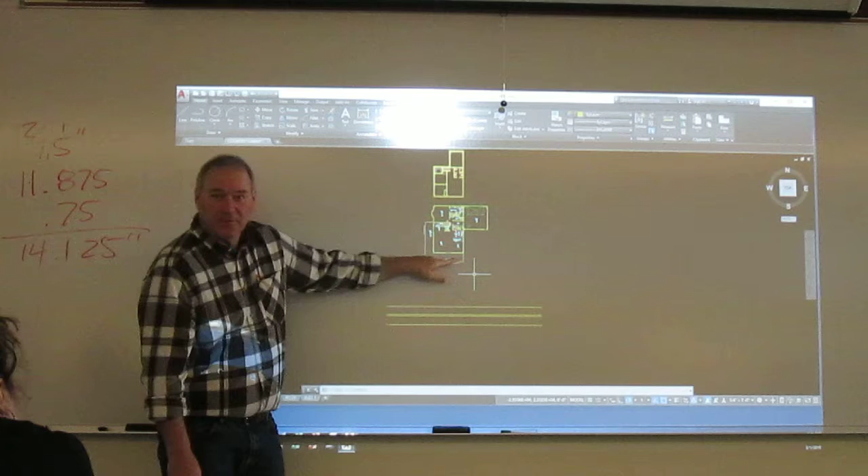That also lines up with my upper floor, but you need to pay attention to which floor you're on. In this case, that wall is constant through the basement and up through the upstairs, so I can grab either one, but if you want to break them off in sequences, you can.

I'm just going to grab this one and drag it straight down. Let me show this. And this one, I'm going to drag it straight down too. That's the edges of my house. Now I'm going to trim it a little bit here. And my basement's done.

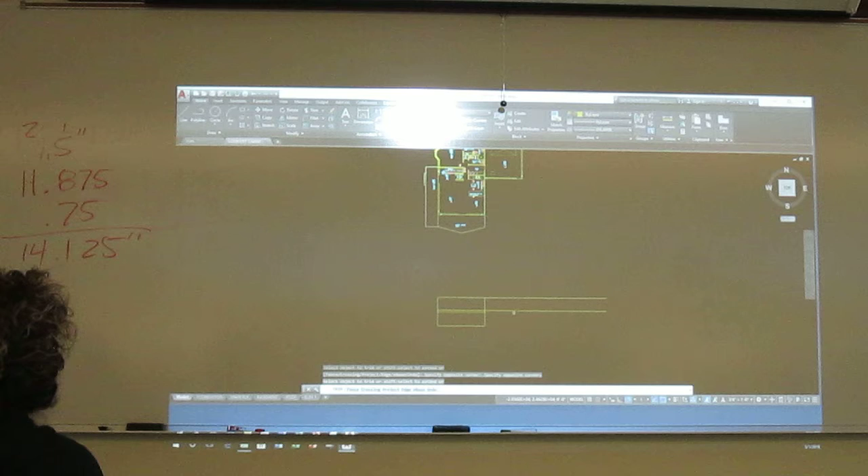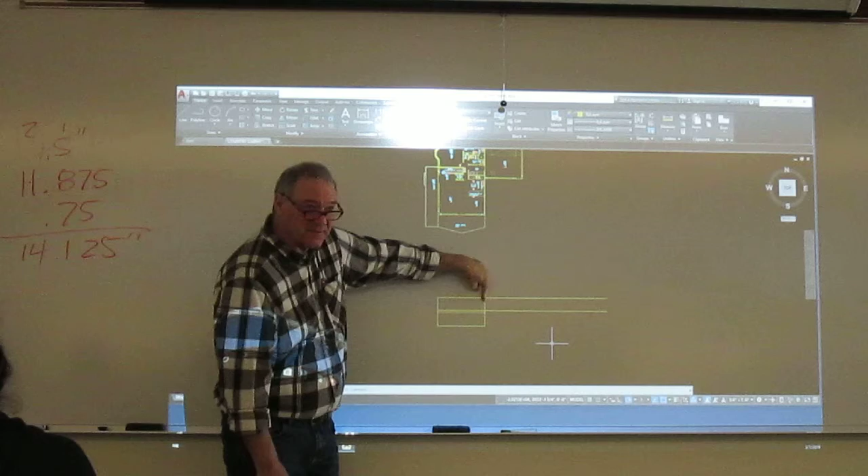So here's my house: basement, first floor. Now we also have a garage sitting out here that's only on the upper floor. Let's bring that other wall down. We know this wall's common right here from the outside, we only see the outside of the wall, right? So we don't need to show wall widths or anything like that in these views.

So I'm going to bring my garage down, and it's going to sit right here. And I can trim that up.

Now the last thing we ought to do height-wise, let me grab my little drawing. We're going to throw in the ground here to help you realize this, because the garage is really kind of not shown correctly on that.

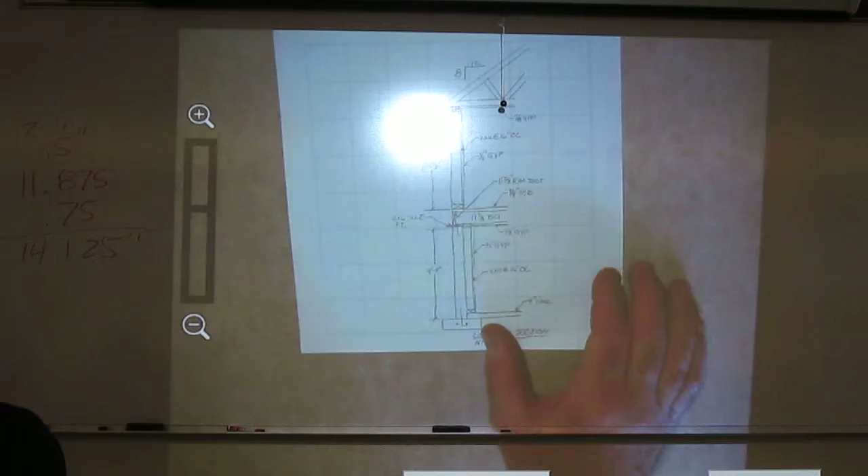Where does our garage sit? We talked about this way back in another class. I remember we talked about this factor. Your garage has got to sit on the level of the soil, right? The floor of it. And this will be the garage floor.

Now the foundation for the garage is going to match up, same as this, but the ground will be down here. We're going to deal with finished floors, so we kind of want to see that. Where is the ground going to be on this house?

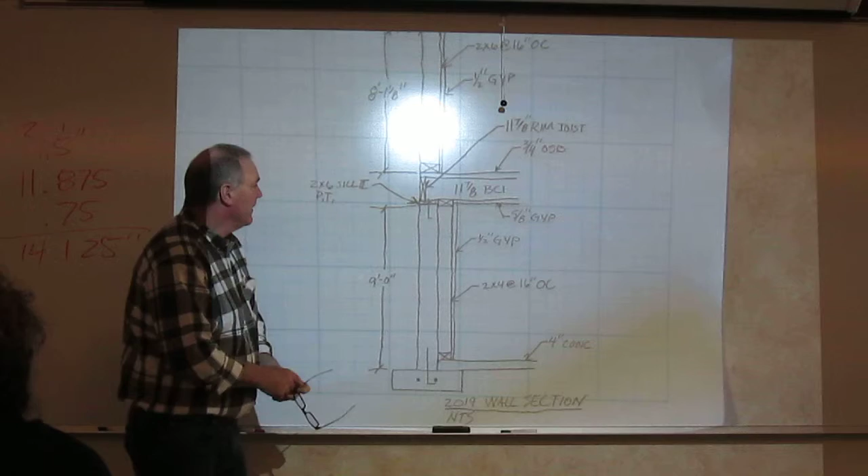Well, by code, this dimension right here, from there to there, must be greater than 6 inches. You have to have 6 inches. The soil can't be within 6 inches of any wood member, let me put it that way. So that's how we pick up that ground.

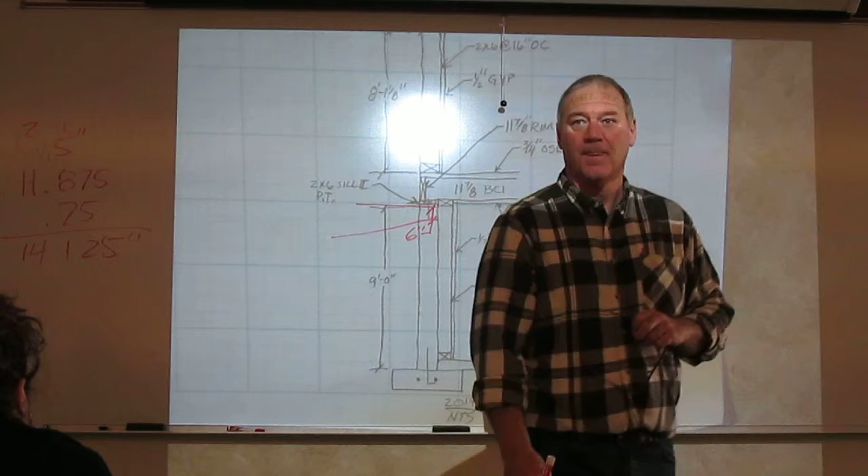Now, we haven't really talked about crawl spaces and foundations, we'll get to all that stuff later. We're just kind of roughing it in. So we can come in here based on this line, top of our garage wall, and find out where our soil is going to be. We can kind of estimate it. Nobody's really going to know until they build the house and grade it, but we can make some stabs right now.

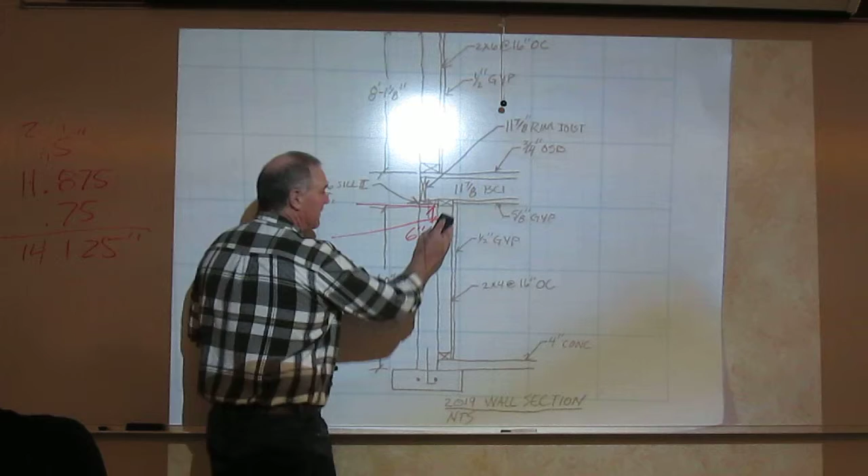So with that said, we got to be 6 inches below the top of that first floor. So let's put some soil on this thing. I'll go back to the computer. So here's my house.

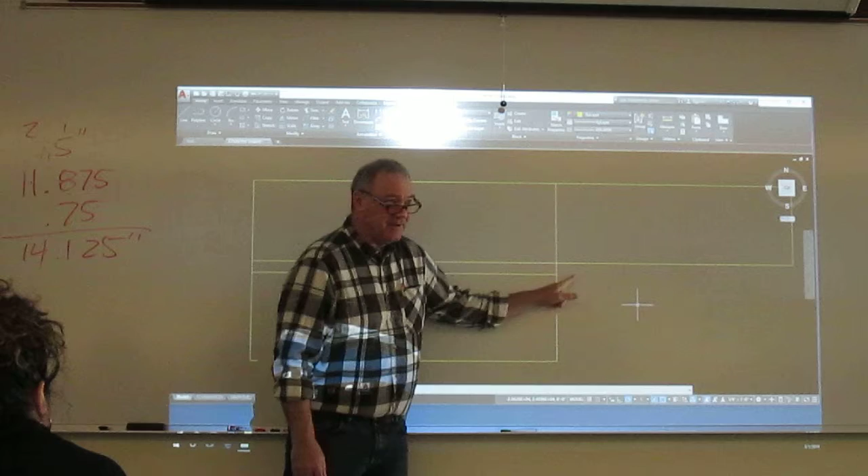This is my ceiling, right? This is the top of that garage wall. Soil's going to come in 6 inches below it. Now, it's clear down here on this level, but we've got the garage that we're dealing with. That's what we're talking about, is up here. And we'll also see it on the first floor up here. So let's do that.

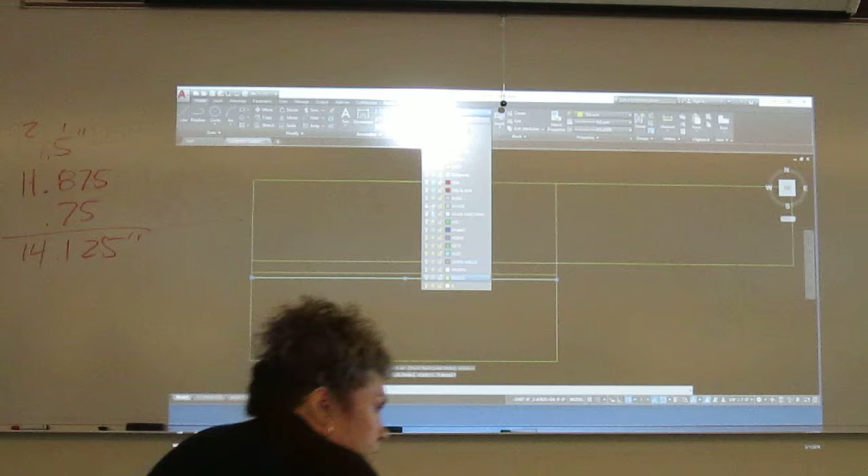Let's do an offset of 6, and I'm going to offset that basement ceiling down 6 inches. Now, I'm just going to switch the color on that so you can see it, and I'm just going to throw a line out on the side like that there. And let me move this one over.

And on the garage, let's extend this outside one down, because it's going to go right there for the finished floor.

Excuse me. So you see those two lines I've got on the side that kind of slope off right here? That's going to represent my soil horizon. If you want to do it now, typically these are shown as very thick lines, so you might want to throw them on your border layer. Do they have to be a certain length? No, depending on how we set up the view, we're just going to chop the soil off.

You've now drawn your first building. Now, the thing we got to look at here, do we have all of the walls? That's what we're drawing, okay. So look up at your floor plans. Do we have all the edges of the wall? Okay, Declan, you're shaking your head. No, what are we missing? The little thing by the master bedroom.

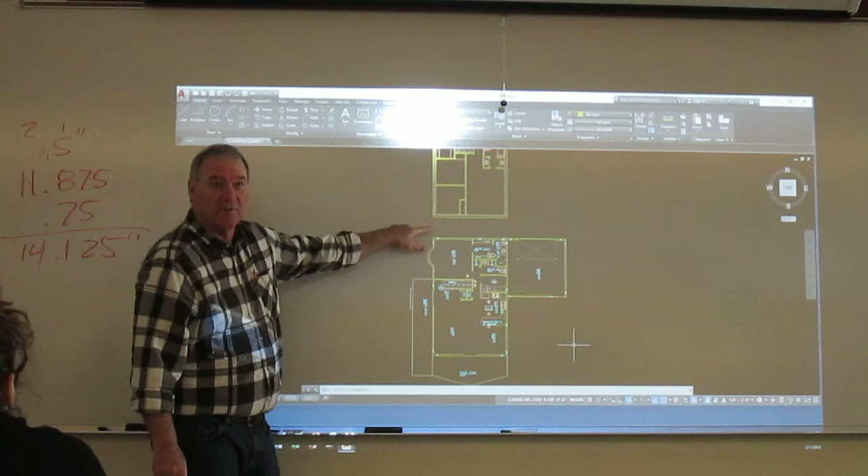We got this. We see this from, this is orthographic, right? You're at infinity looking, so you're going to see this true size and shape. So if you've got this in your plan, we need to project it down. So I'll bring that edge down. And that is going to go, again, it will be on that finished, it'll go clear to the soil horizon. So you see it kind of like this. If you don't see it from this view, you don't put it.

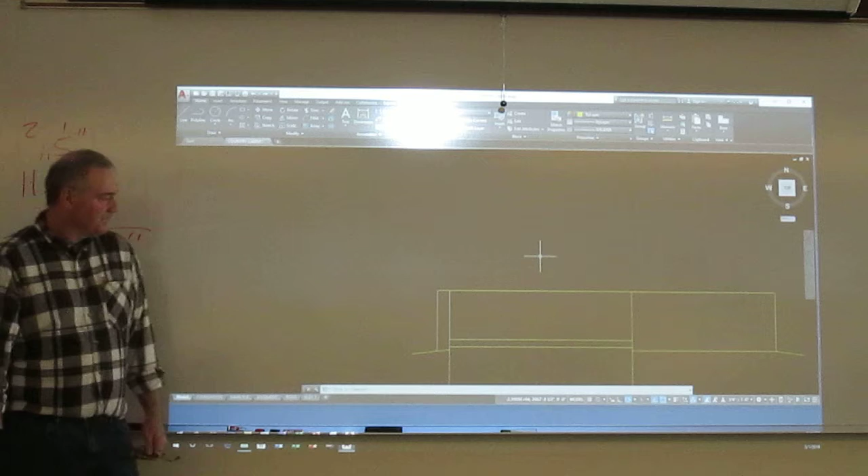Now the next thing we want to do is we want to throw in all of your doors or all of your windows, whatever you see. Now I don't have mine really drawn in these two views, but I'm going to kind of estimate them.

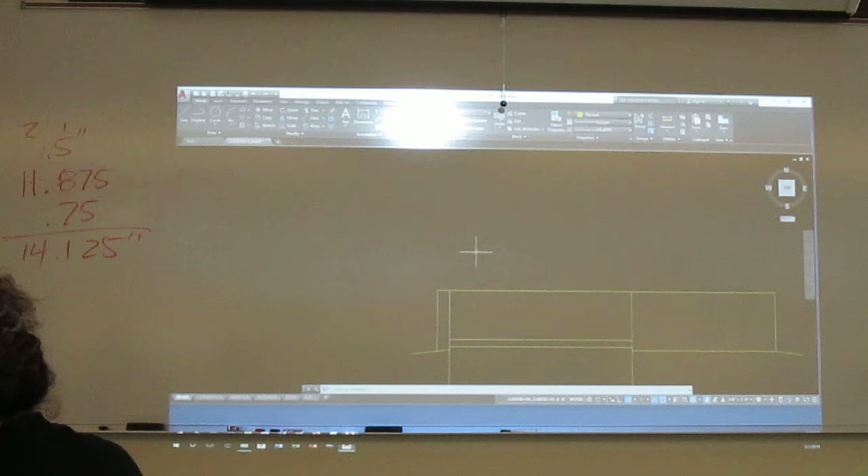Okay, so in the basement, your client asked for a window in this room, right? We need an egress window, so it's going to be a window right here. And there's going to be a slider right here. And I'll just call this a 6-foot slider.

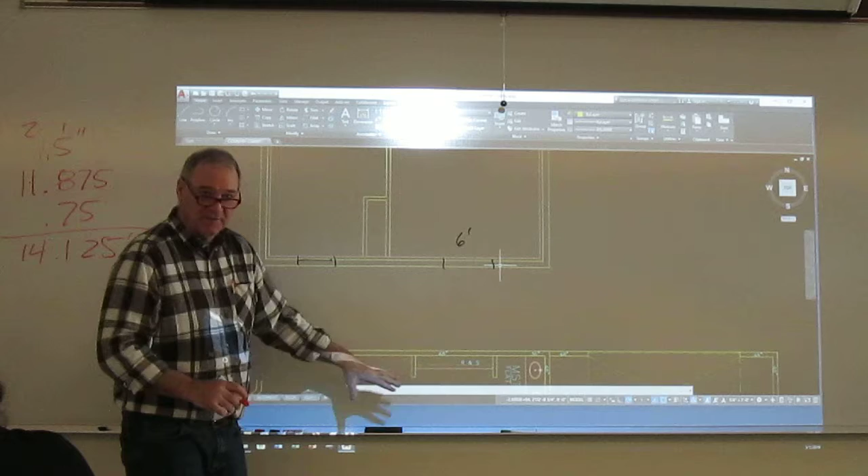So let's project, since there's only 2 in our bottom floor, and I would suggest you stay logical, do all the top floor and then go to the bottom floor, or all the bottom, go to the top, so you don't miss something, right? So I'm going to go on the bottom, and I'll just pick spots for this. Okay, and we're going to bring those down.

See how close I can come to my little black marks there. Nearest, look at that, it's right there. Okay, and all I'm going to do is I'm just going to project that way down through my drawing. If I had that drawn in, I'm just snapping. I've got to go ahead and do an offset of 72 here. Okay, so there's the 2 sides of my door.

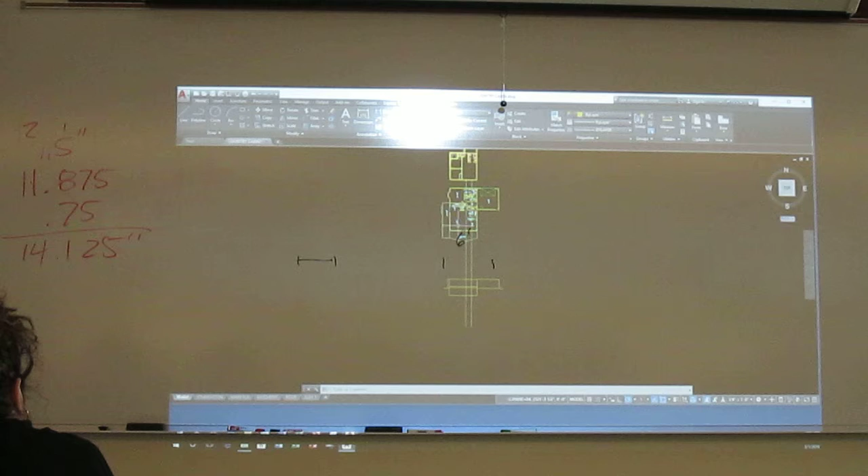And you would project that right from the view if you had that drawn in. And then I'm going to have a 5-foot window over here too, so let me just go ahead and kind of guess it. Using their snap, it's going to be about right there. I'm going to bring that down and we'll copy this over 60 inches. Okay, so I've got a door and a window there. And I brought that down.

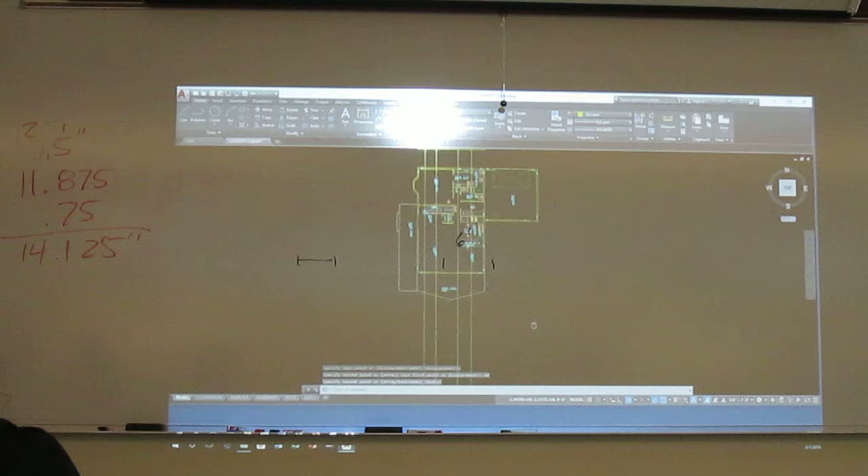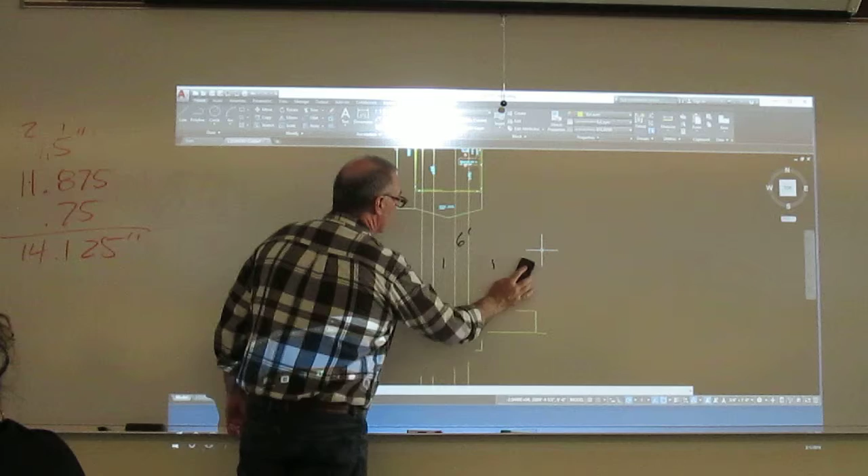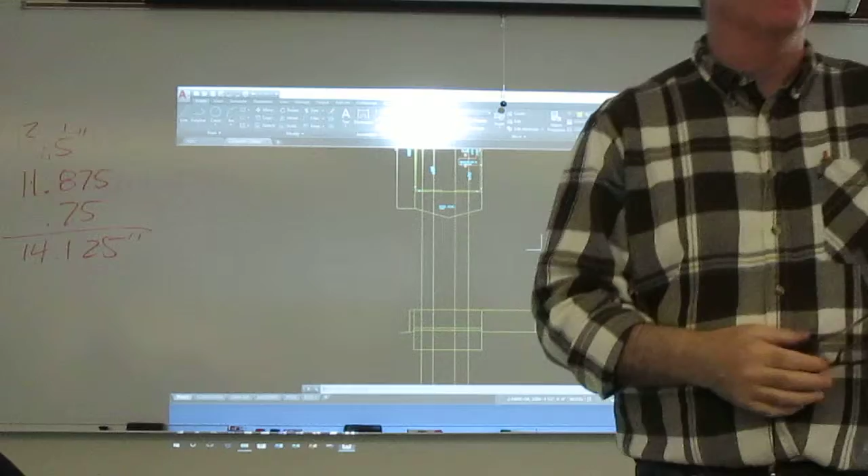Y'all good on that so far? Okay, now what is the height of doors and windows? The standard height is 6 foot 8 inches. That's where we put almost all of them. There are times you will adjust that. If I'm doing a 9-foot wall, a lot of times I will bump that up 6 inches or even a foot. It just depends. For us, we're going to stick with 6 foot 8. Okay, that will be the top of all doors and windows.

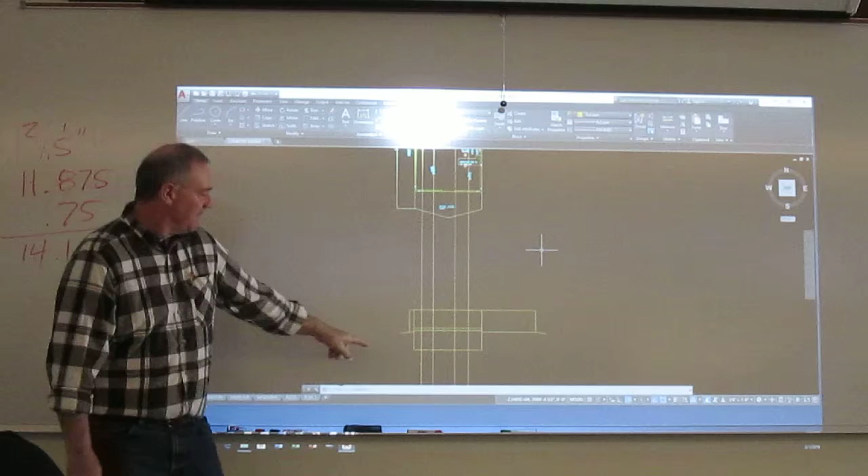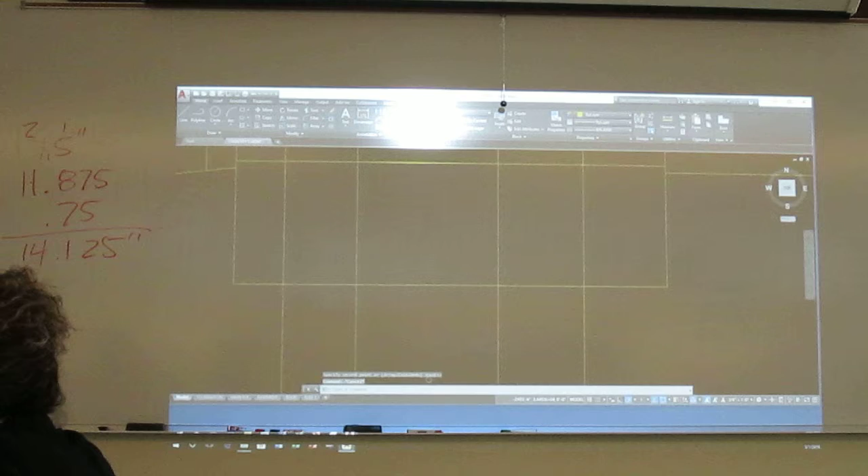So I've got my finished floor right here, right? So I'm going to offset up 6 foot 8 for the top of it. Okay, so I come down here and do an offset, 6 foot 8. Bring that up, that's going to be the top. So I'm going to trim all these lines back to that guy. So here's the tops.

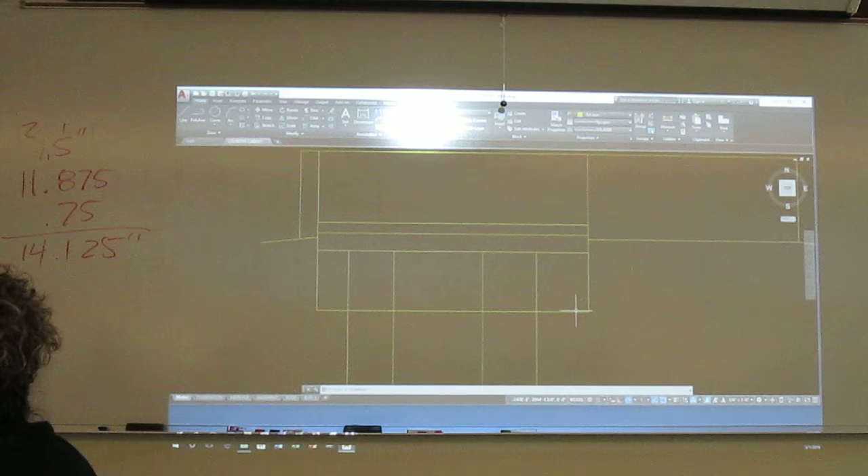Do doors go all the way to the floor? No. Actually, yes, they do, the other person. Yeah, they got a threshold, but again, we're gonna be printing this at a 1/4 inch to a foot, you're never gonna see a threshold. It rises about a 1/4 inch. A big one maybe goes a 1/2 inch. So my door, I can just trim off on the bottom, it's gonna be full height.

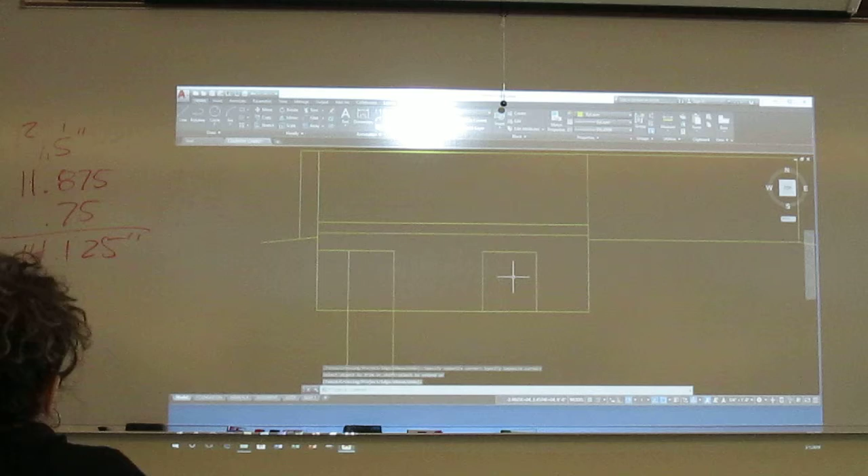My window, I can now offset the distance I want from my window. Now, I put 5 foot wide, I'm gonna say this is 3'6" high. So this is gonna be a 5036 window. So I'm just gonna take this top line and offset it down 3'6" or 42 inches.

And then trim it up. Starting to take shape now? Starting to look like a house maybe?

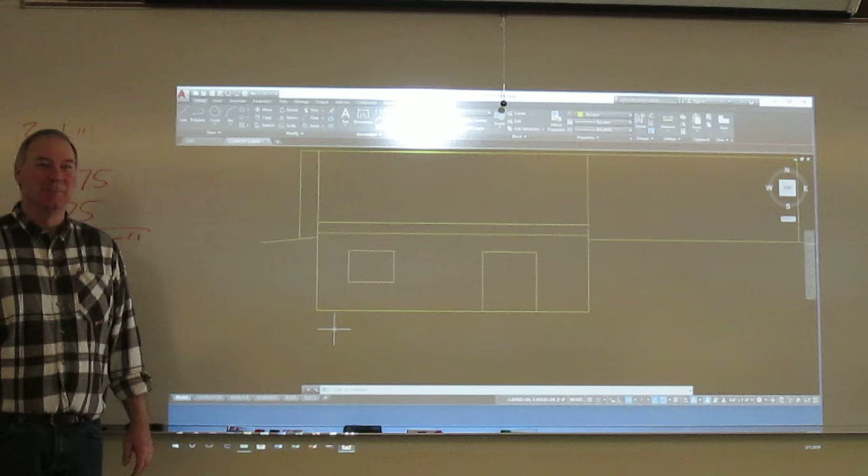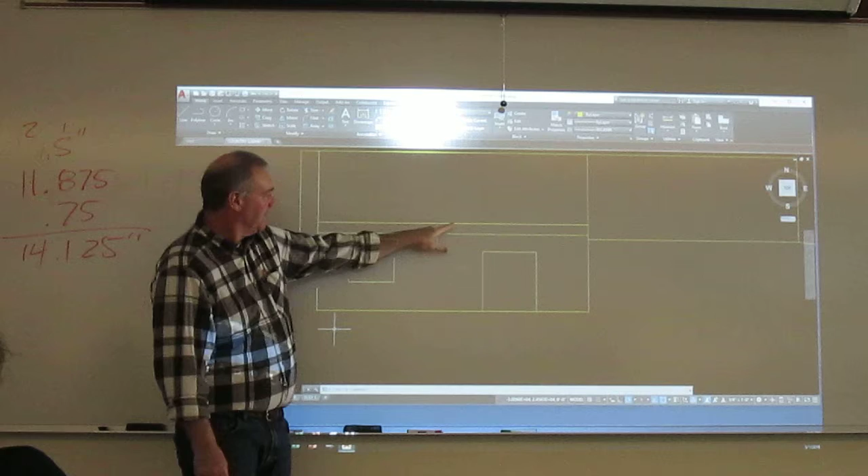Good to go? Okay. All right, on the upstairs, you would do the exact same thing, project down your doors and windows. You got double French doors in the center. You've got windows we'll figure out as we go through. But there's your finished floor. Where's the top of that door and windows sitting? 6'8". Okay.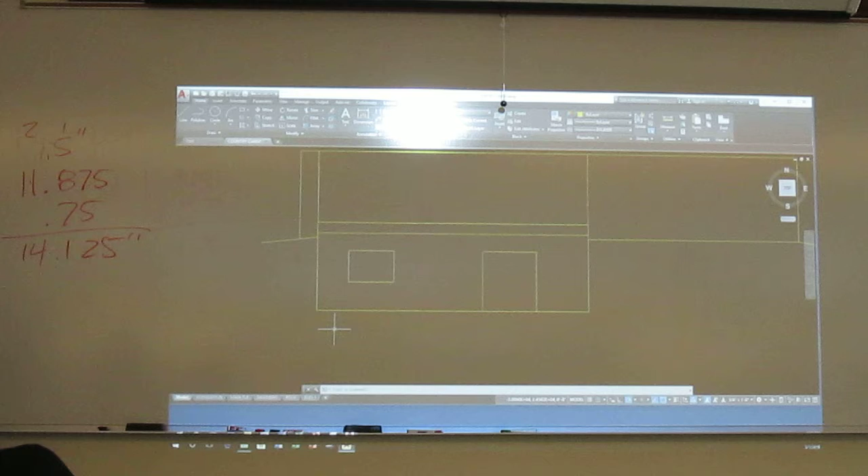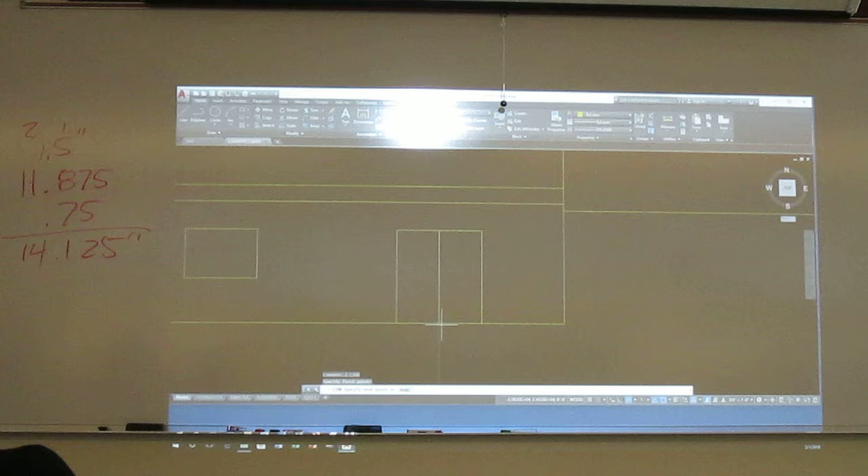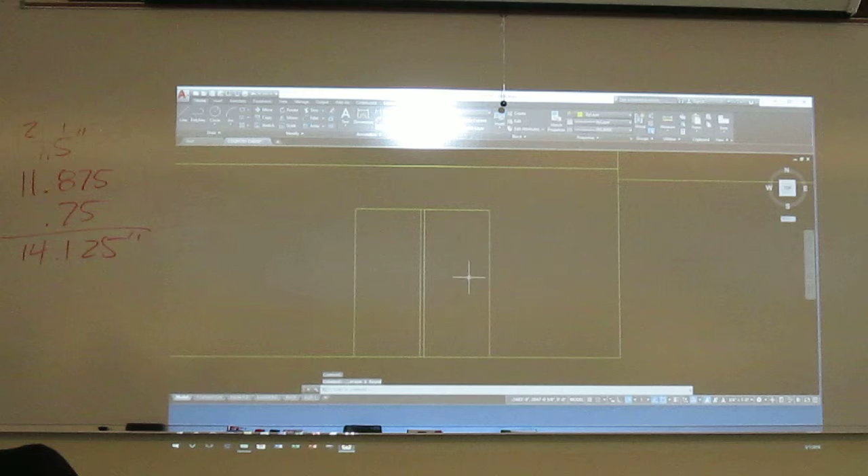For now, let me just, so you can go ahead and do that. Now, you might want to spend a little time in here because really this door is a slider, right? So I might come in here and do an offset of 1 and build my little frame on it. Like such, I draw a center line, throw the frame in. You might put a little trim around the outside, whatever you want.

I'm going to say there's 4-inch trim on this character. So I'll throw it there, there, there. Then I'll do the extend.

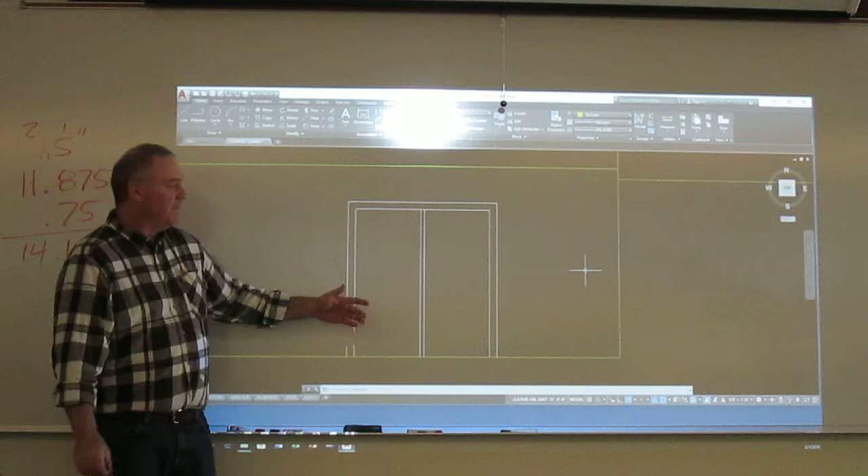Now, doors and windows, again, these should not be 024 in line weight, right? But that looks a lot better than just one line. That's going to go, I'll put it on the 0 so you can see it. If it's a front door or something, if you can see a knob, you might have a knob on here. This is a glass slider.

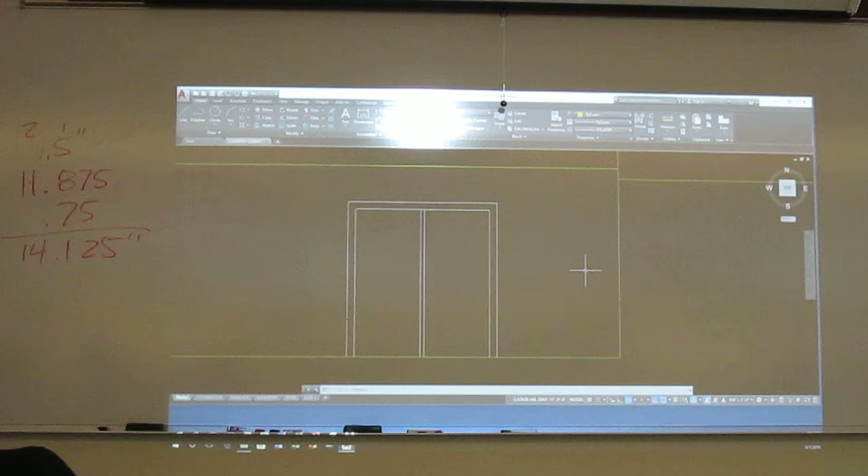So I'm going to come back and hatch this with glass later or show my little glazing marks, however I display them. When you get to the upper floor, let me just point this out. I'm going to show you the elevation here that I kind of got done on this guy.

What the heck did... I got some stuff turned off here? I do.

So here's in essence what we sketched in, right? The client kind of sent you this as a sketch.

Now, we're not going to do a post and beam ceiling in here. It's too expensive to do on the residential market with this guy's and gal's budget. So we're going to do a truss system. Now, don't worry about these windows that sit up above the top of the wall. We'll handle those when we do roofs, because they're actually going to sit inside the truss system.

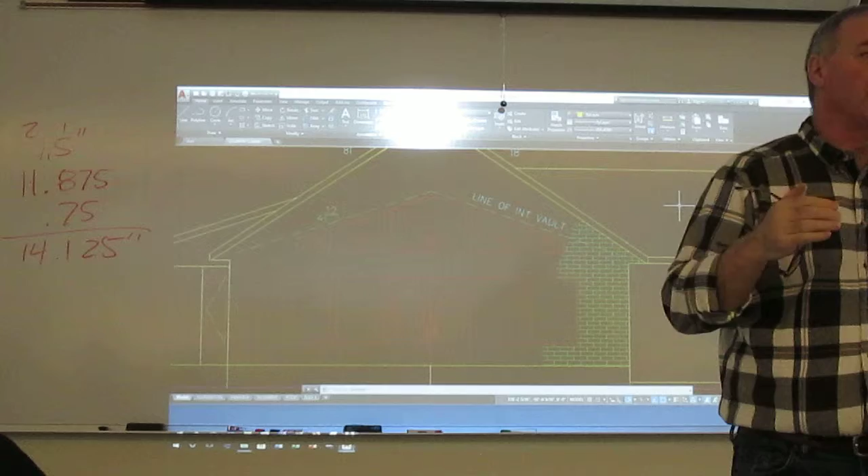And this interior vault, because your client told you, hey, from the living room through the dining and kitchen, all that should be interior vault, right? That will be spec'd out with a scissor truss based on what the truss designer can do, which ultimately is your outside angle. Most of our interior vaults are always half of our exterior slope. So if I go an 8:12 here, this is probably going to be a 4:12.

That's the ceiling. Obviously, I don't want to put a window up in here. It's up in the roof. Nobody's going to see it. Well, I won't see it from the outside. See the trusses and insulation.

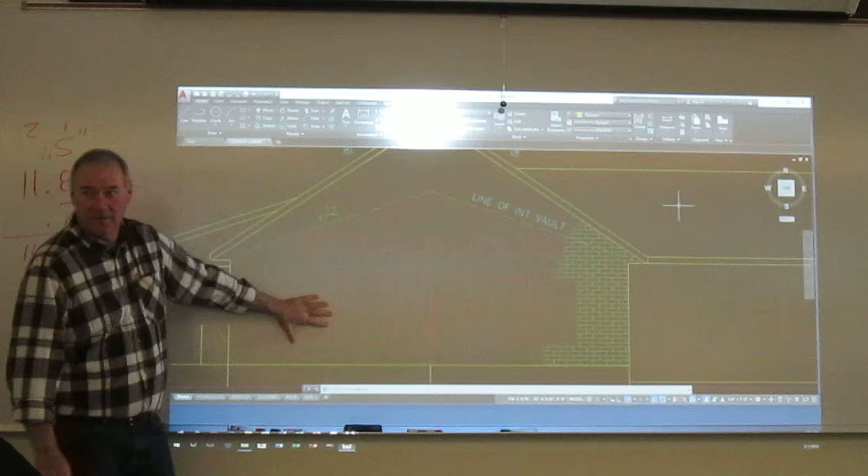So don't worry about these. We'll get to them later. You should just kind of rough this in. Okay? Can you see those okay with that red? Let me just real quickly throw those. I'll throw those onto a different color so you can see them. And go ahead and do these two.

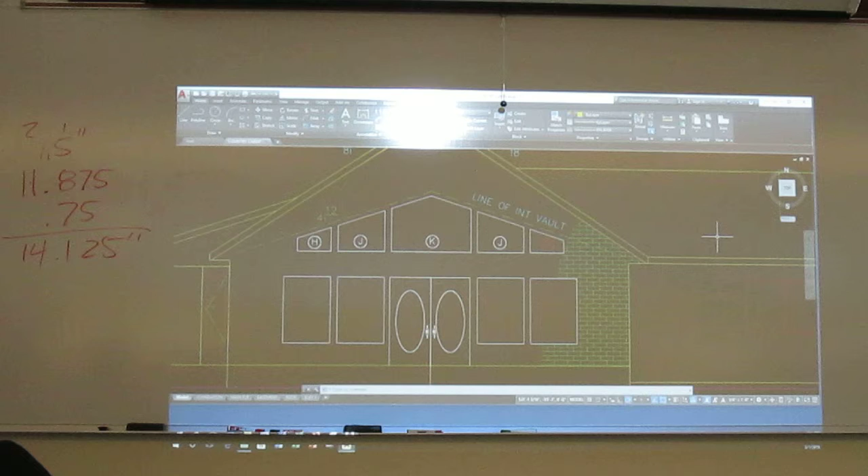Okay, so now you can maybe see them a little better. So that's going to be pretty close to the way yours is going to end up probably. Now, in essence, could I make this just one window? Yeah, you could, but it depends on what you do down here, because you want, remember, uniformity—people find that attractive.

So that's my upper floor for this character. Now, you'll come up with these windows, well, we've got to get into shear walls and stuff we need structurally before we can tell how much glass we're going to have here.

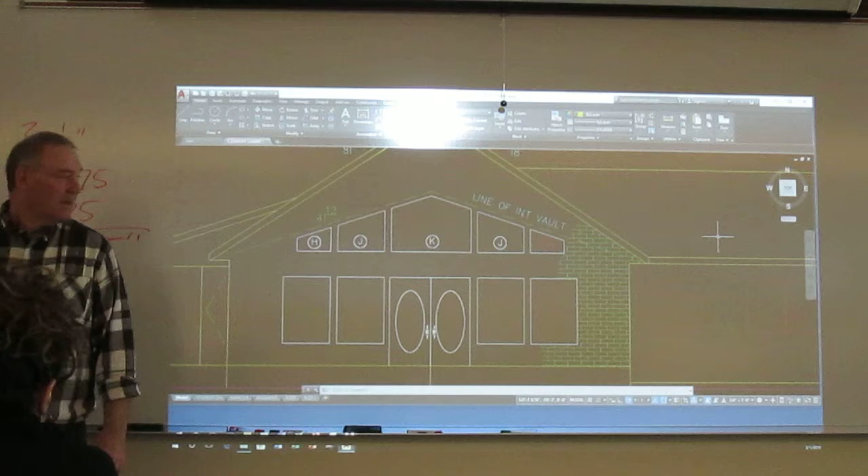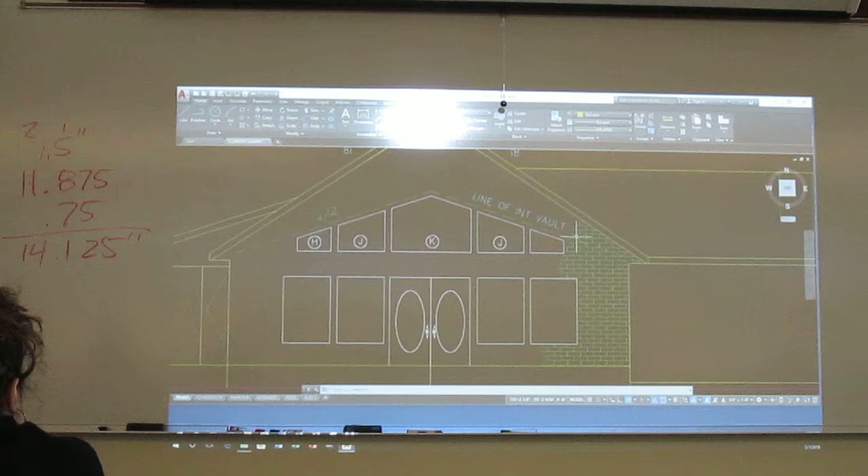So you can estimate that in. If you can get a couple of these views done, do the wall section, project from it, do this view, maybe one more view, that will help us put this roof together when we're done, as we move into it on Tuesday. Now, just real quickly, how do you go about doing a view such as this?

Let me just show you how I would set that up. I've got all the information right here. If I wanted to do, let's say, the front of the house right here, which in this instance might be my front elevation, but I'll call it my left here, all I'm going to do is copy this stuff and put it right over here.

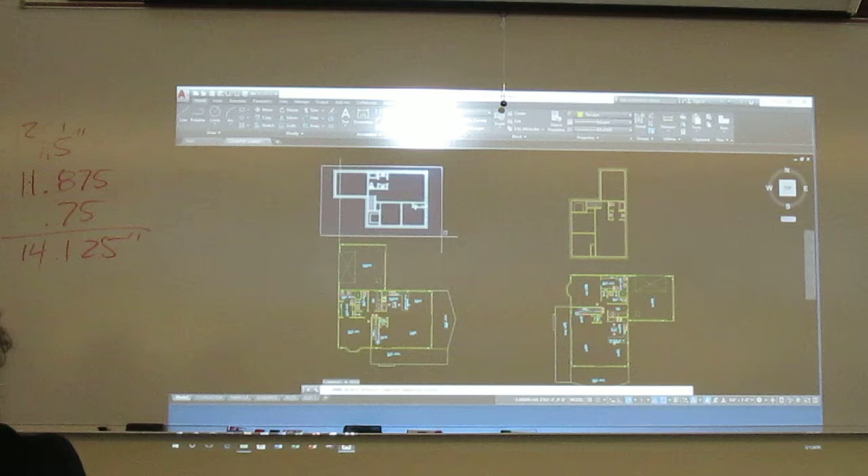Now I'm going to do a rotate so that I line up that character. I'm going to put that one where I'm looking, and then rotate the top one, make sure I get it all here, and rotate that. I'll do a move previous. Again, you want to make sure you line it up, so that line lines up with this line right here. Again, line it up.

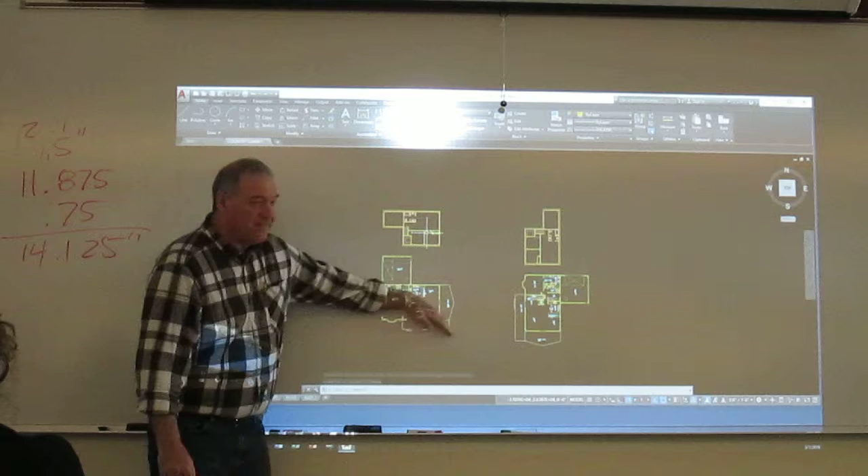Now you know the beauty of this? I've just set up a different look at it. When I go to draw it down below, I've got all my heights for everything, except for the roof. So now, if I'm doing the ceiling here, all I do is grab these and pull down.

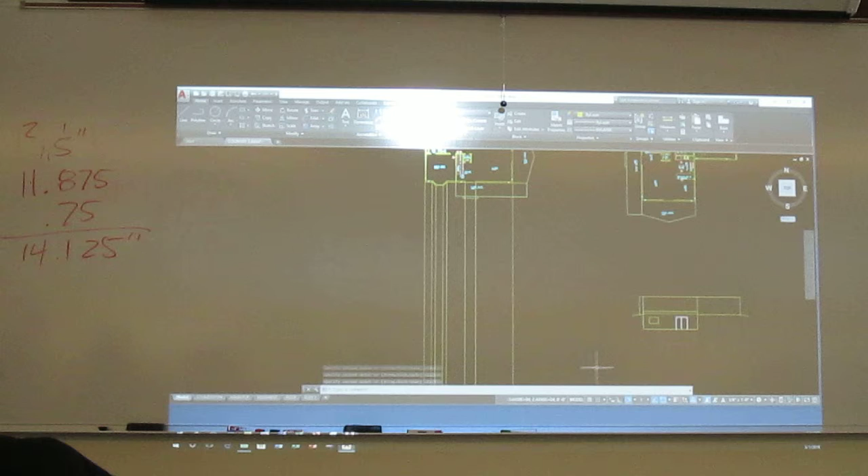I'll pull that and do a copy here, and I'll copy to my walls, edges. I'll do doors too here. So there they all are. Do I have all these heights right here? There's my bottom, right there.

Let me run a trim. There's the bottom. Where's my second floor top? It's right here.

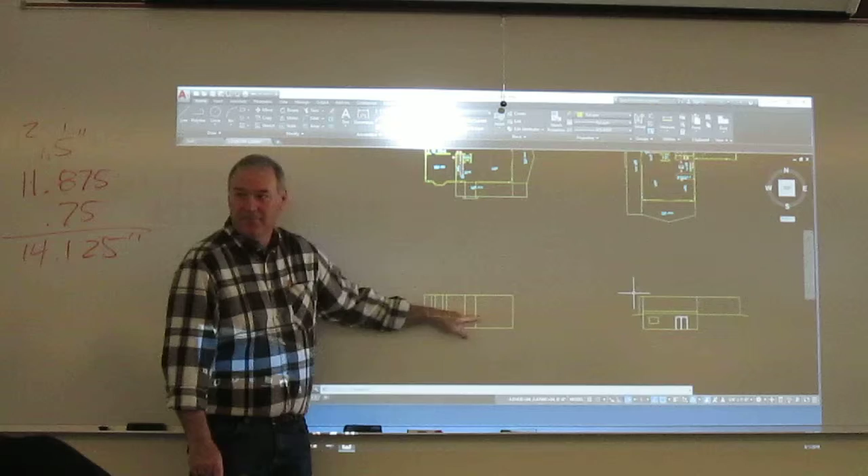Just drawn. Now I'm dealing with this view. I only see the basement over here, right? So I would then do my second, pull it down, because this is only over here, it's not over here. And you can draw these fairly quickly.

You know what else is nice? Finish this view. What's the other side of the house going to look like? The mirror image of it, right? So I just mirror it, then replace doors and windows, make sure my roofs are aligned, the structure's shown. So if I draw that left one, what am I going to do to my right one? I'm going to mirror it.

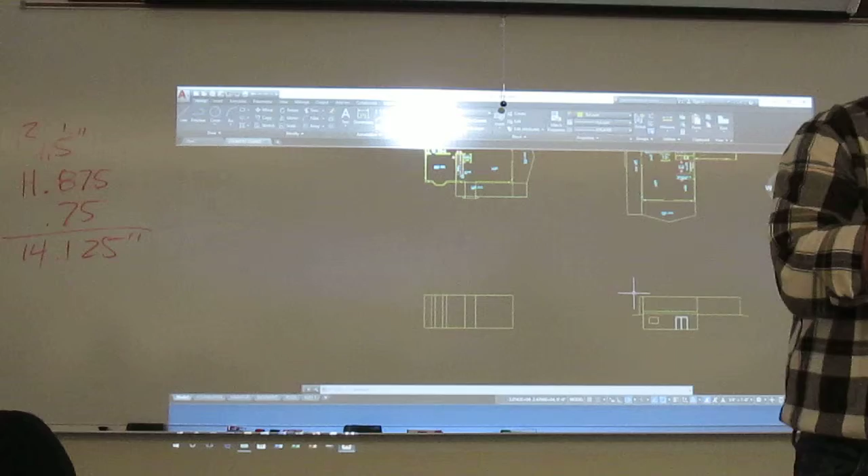You can draw these actually very quickly. If you do this for a living, this would be maybe a half a day's drawing to draw all four of these views and have them tricked out, dimensioned, everything. We will make these look very nice. They're orthographic, meant for building, but this is the only place the client gets to see how the house looks, so we spend a lot of time doing some of these to make them look very nice.

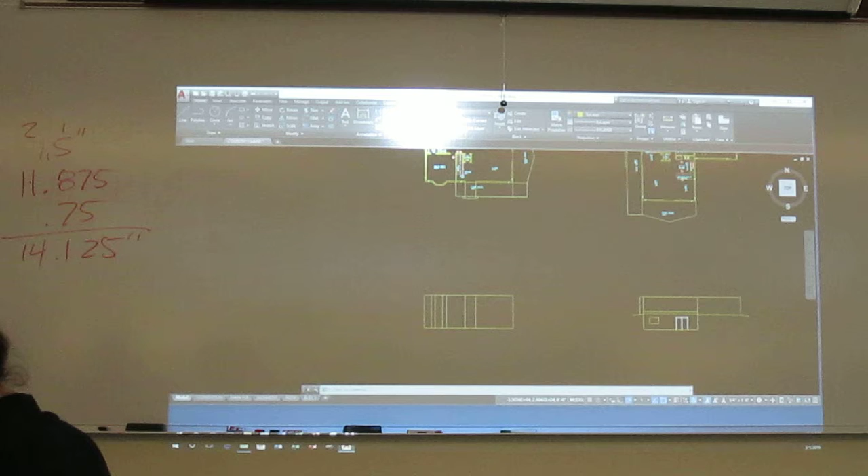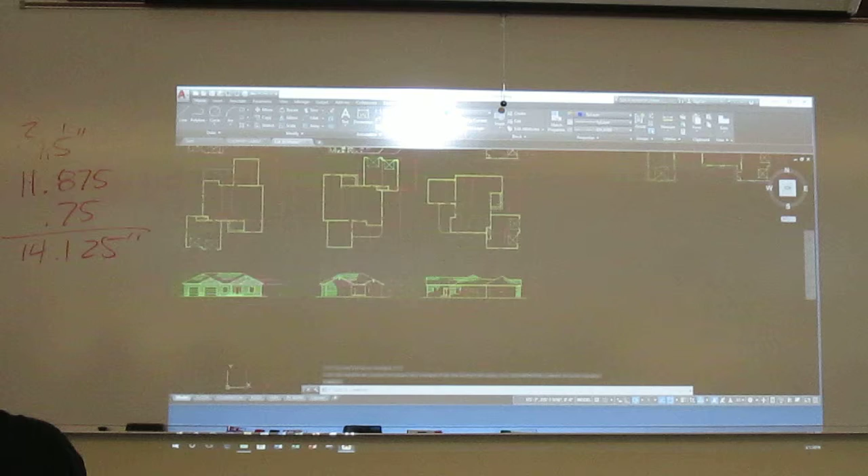There's some great examples in the text. Let me pop it open. Let's see, do I have Brockway stuff in here? I don't. I might have one that's done. Let me open this file and see what's in here. Nah, I turned these into design files, so I've lost a lot of my stuff. Anyway, we'll get more into that later.

What you should do right now is just kind of rough in a few of those views. Now, what we'll end up doing, if you got them up to the second floor, is we're going to start putting a roof on this while we're developing the plan view of the roof, and we use those two together. That's why I wanted to bring this up today.

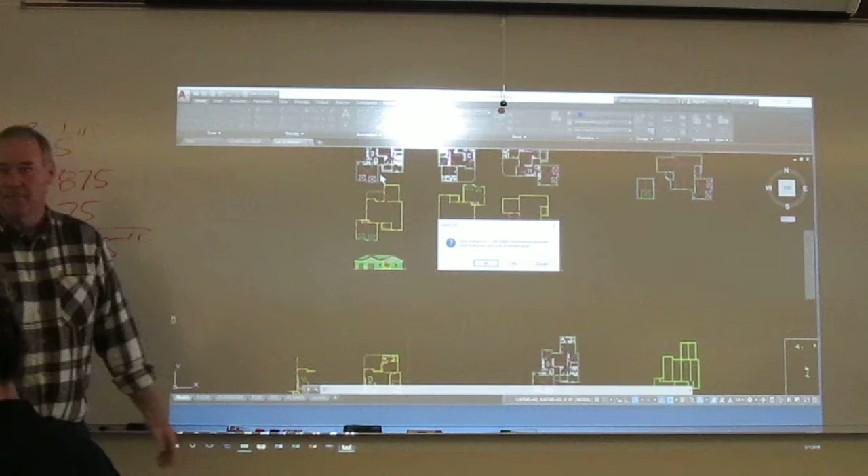Meeting after, should we give everybody a 5-minute break or so? Whatever. Any questions for me before I give up the floor?